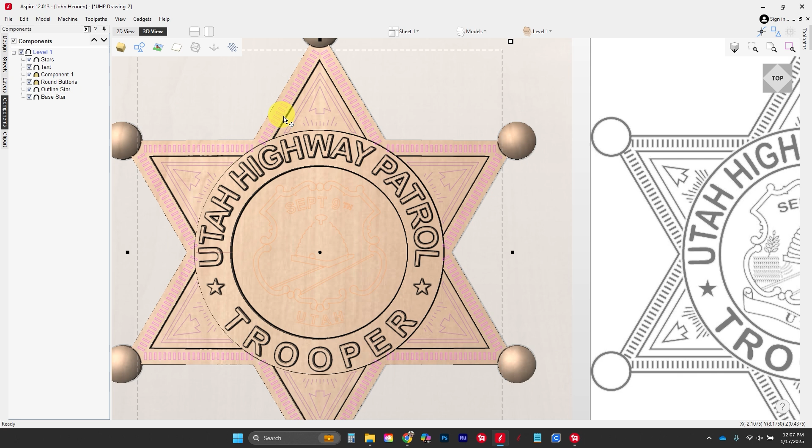We're going to start again working from the back to the front. So the outermost back piece is going to be these little dashes right here. Let's go to our design tab, we're going to use our angled shapes, and I'm going to set this at 60 degrees.

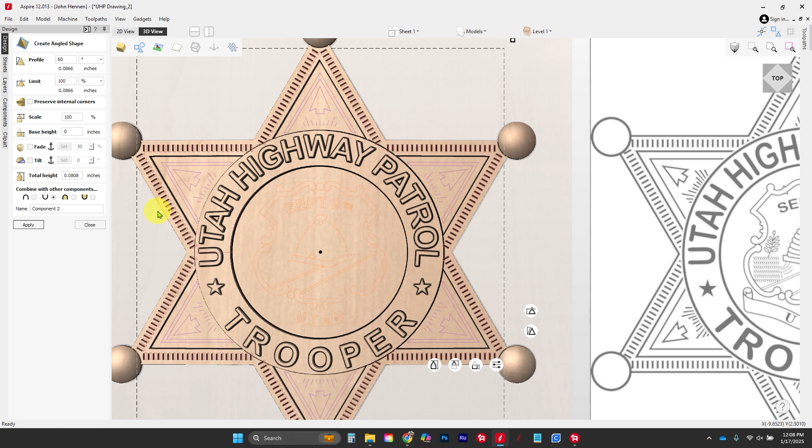We're going to put this on subtract, which means instead of going up from the plane it's on, it's going to go down. So instead of making points that come upward, it's going to go down. We'll go ahead and click apply. So what we've done is add these little dashes in here that are going to go down in.

With that one done, the next shapes are going to be our arrows, so let's go ahead and work on those. We're going to go to our 2D view here, and when we build these we're just going to select one arrow, do like we've done everywhere else, and array it around the piece. So let's go ahead and build this one arrow.

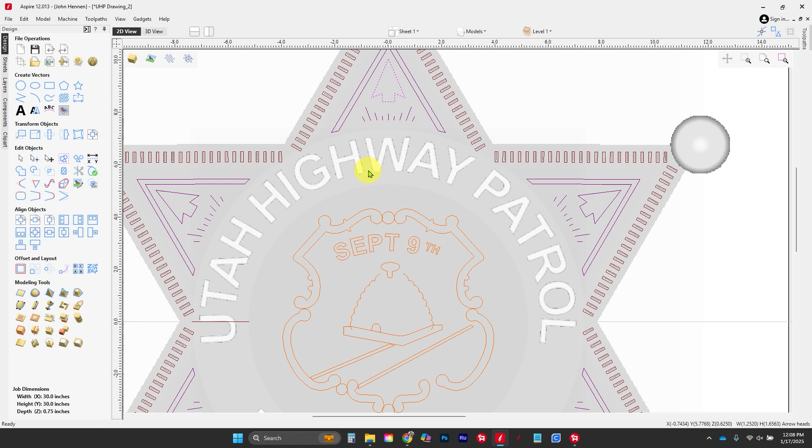Now when building the arrow, I want to make it look like an actual arrow. One of the things I'd like to do on this one in particular is make sure we are first in the arrowheads layer.

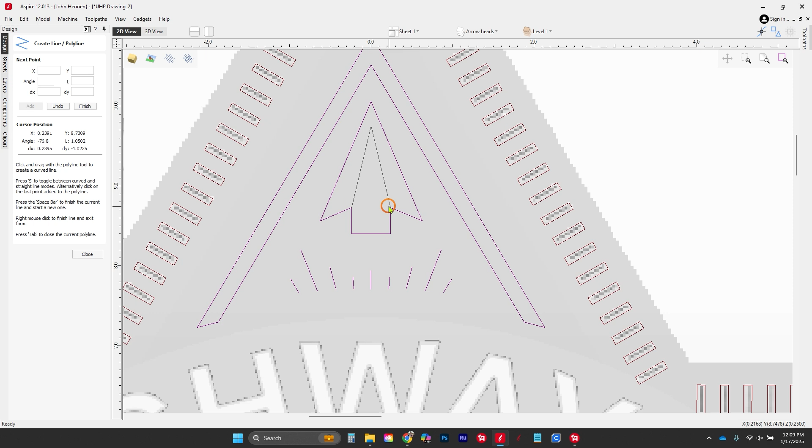We're going to come up here, bring it to about maybe there, and then down to here. We're going to add and cut this arrow into two pieces to make it look like a pretty cool little arrowhead.

So there's our first set of lines we're going to add to it. We're going to go to our node mode here. I'm going to cut this away and cut this away, and I'm going to take this section here and join that together.

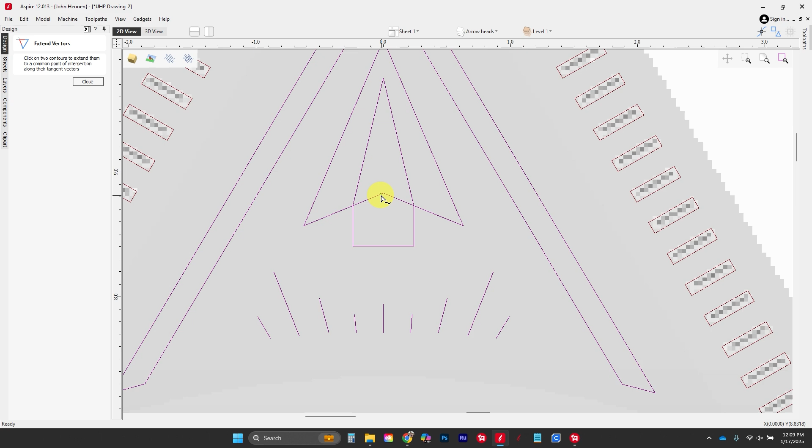Then this one here, I'm going to use another tool called extend, that's this guy right here. Extend is going to allow me to extend this one till it touches that one, just like that. We're just going to make sure that they're closed. Now we have a two-part piece that we can work on.

So let's zoom in on our 3D view and see what we can build with this guy. First things first, we're going to build this one, and this one's going to be pretty cool.

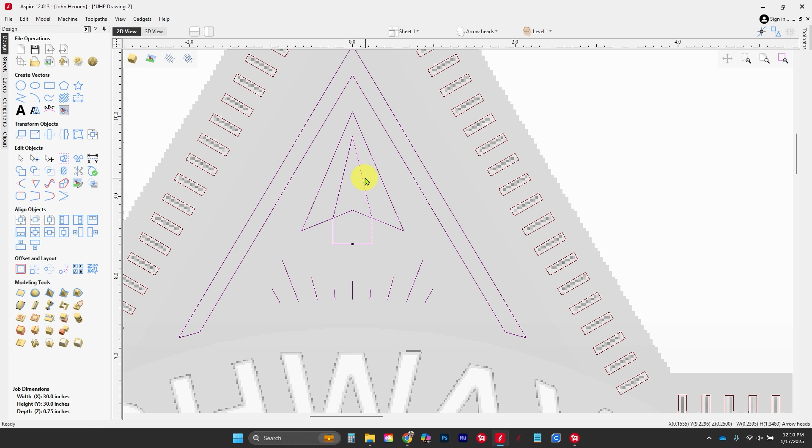We're going to do what's called a turn and spin. To make turn and spin work, we're going to cut it right here in the middle, cut it right there, and then we're going to take the left side—so the right side of the model right here.

And we're going to use this one here called spin. It's going to say we're going to do a turn, which is from start point to end point. It's going to rotate over, and we're just going to hit apply. Let's see what she does—she's going to give us that point right there, which looks pretty cool.

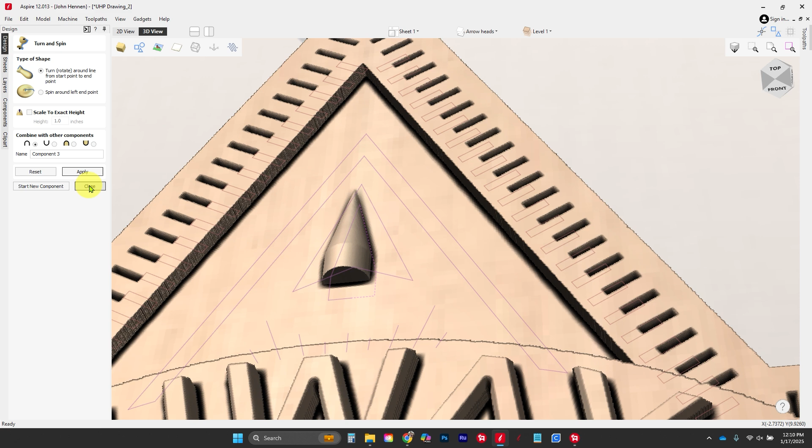I do like it. Now what we're going to do is scale it to an exact height, and we're going to make that height probably something close to 3/16 of an inch. Let's see what she looks like here. All right, that is kind of what I'm looking for, and we might change that a little bit more. We'll see in a minute.

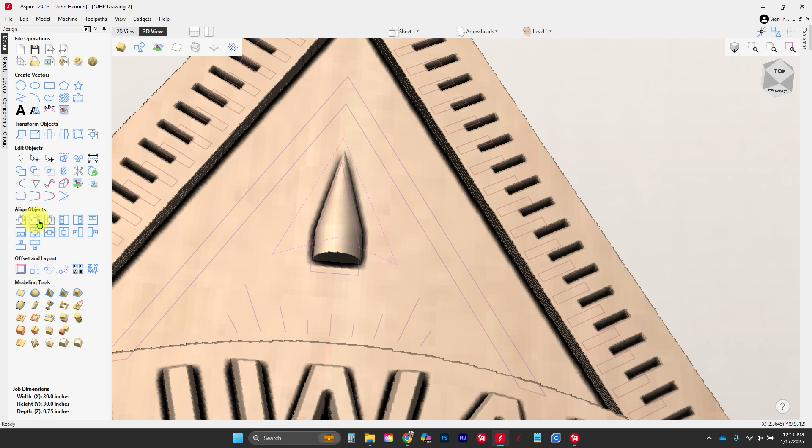Okay, now with that portion done, we're going to use the outer piece. And the outer piece, we're going to draw it, and then lift up the back side to make it look like an arrow pointing down and in. So on this one, we're going to use the angular shape.

We're going to make it probably something close to a 45 degree angle, and then I'm going to limit it—this time to inches. Let's make this like 1/4 of an inch. Okay, and it's going to look something more like that. Okay, the flat's a little too flat.

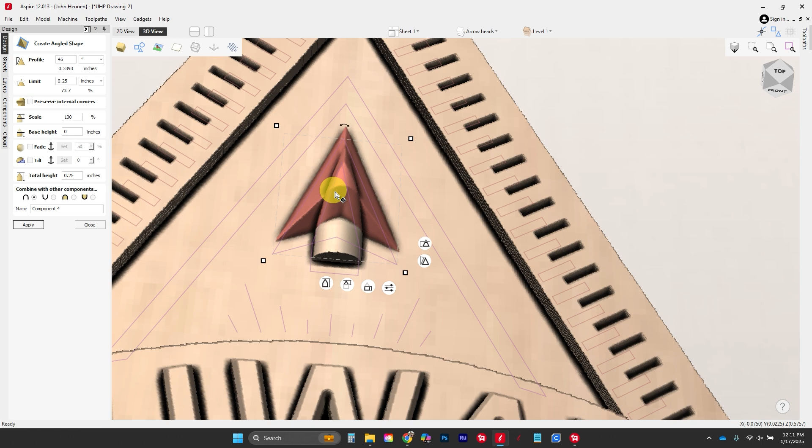I want to do a taller angle, so let's go with 60. I want a longer flat in there.

That's a little better. Let's try like a 75 - I think a 75 will look really good. Okay, let's hit apply again. That's kind of the shape I want.

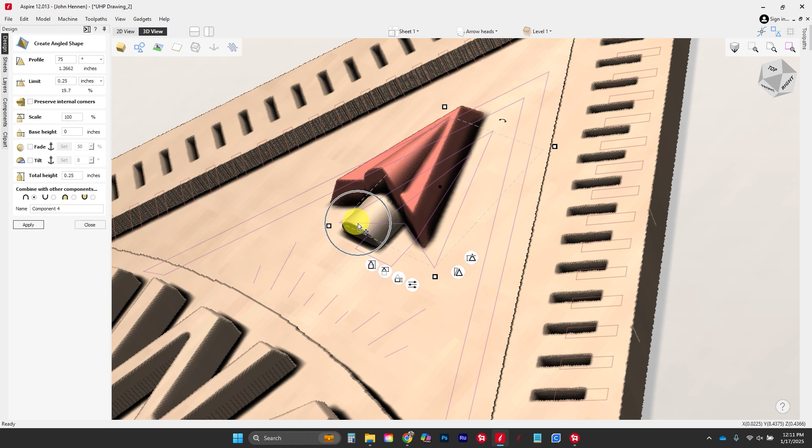Now what I don't want, of course, is that this guy's disappearing into there. So we're going to change this to like about 1/8. Doesn't need to be very tall. I want it a little bit smaller so I can lift the backside up. Okay, here we are. We look good.

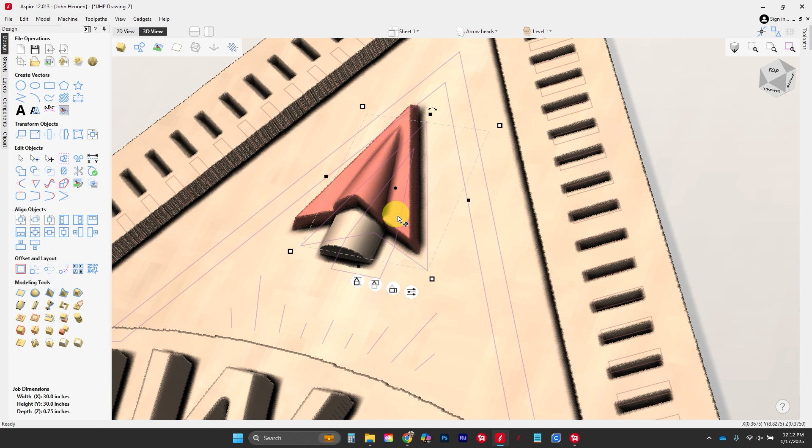We've got a little problem here with the blending of everything because we have an ad on top of another piece here. So we have to figure out how we handle this. Now, the problem is I want this piece here to merge into this piece here. And if I merge them, then what happens is they'll all disappear down into the base of here.

So I have base star. So to make this work, we're going to come over to our Components tab. We're going to right click here and go insert a new level. And this level, we're going to rename. We're going to call this the arrow and points. Arrow and points. Okay, so that's this one.

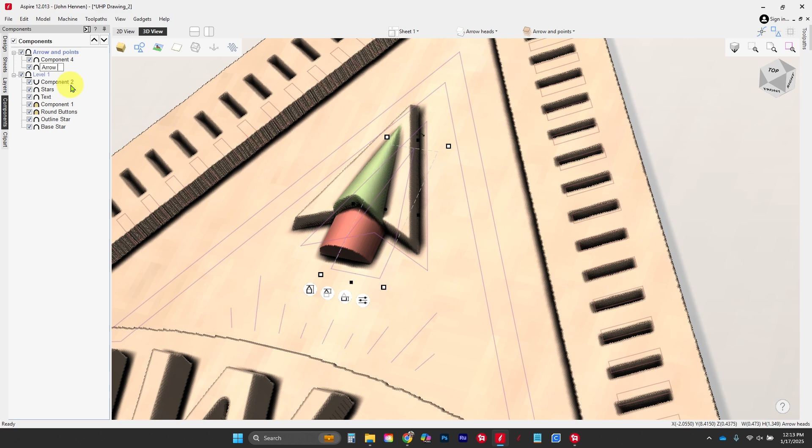Now I'm going to take these two components, these last two, which I forgot to rename, so we can rename them now. We're going to take this one and rename it - this is going to be the shaft of arrow, or arrow shaft. And this one here, we're going to rename arrowhead. You don't have to rename things, but it does make it kind of nice.

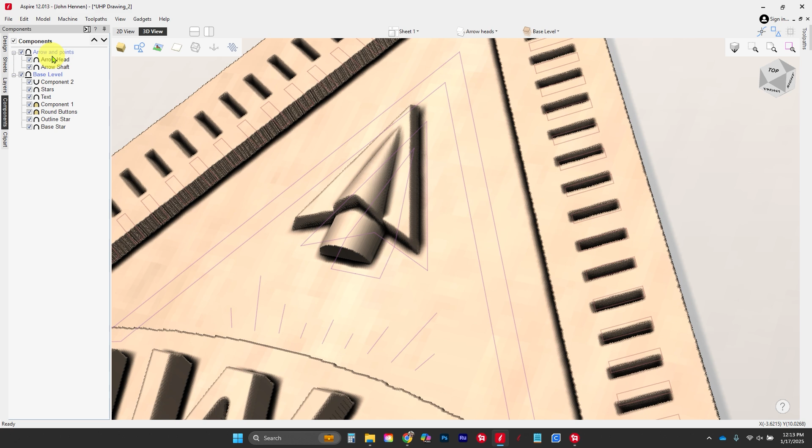So now what happens is that this level, which we can rename our base level, has all of our base components here. And now everything we're putting on top of something else, like these, for instance, we're going to say, I want this guy here to combine, merge, with the other one. And so now it's going to look kind of like this, more like an arrow.

The only thing I want to do from this one is when I tilt up the back side, maybe bring that one in a little. Let's decide. Let's go ahead and play with it now that we can. Okay, so there's my arrow.

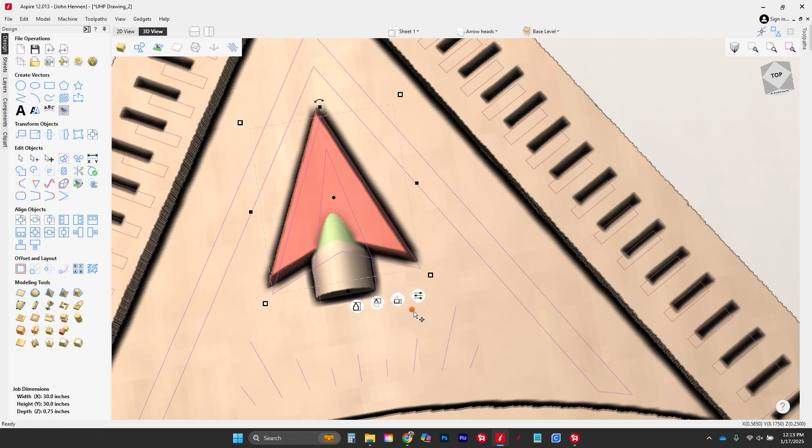I want to take maybe this guy here and squish him because I want to drop his Z height, but I don't want to do anything else. So I'm going to come to here, which is my shape height. I'm going to change it to an eighth and just see what it does. I want it kind of a little flatter, not quite so tall.

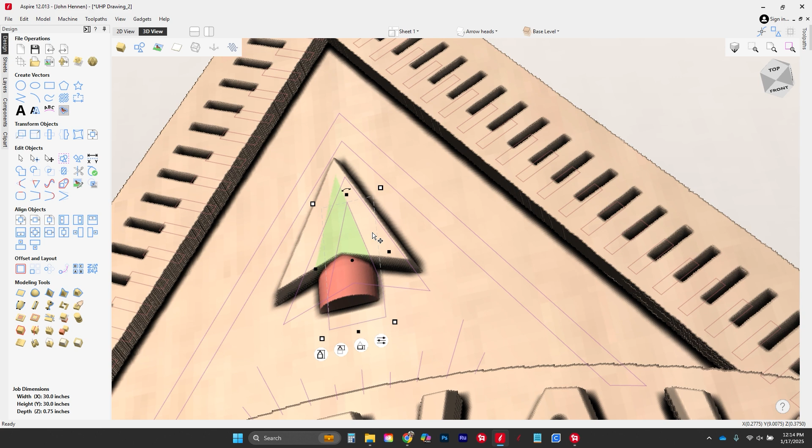Okay, that actually looks pretty good. I want to work with this one here, and I'm going to go back into my angular shape. I want to bring this one back to a 60. I do want a little bit more angle on that one there. That looks a little cooler. All right, so I'm pretty happy with that arrow.

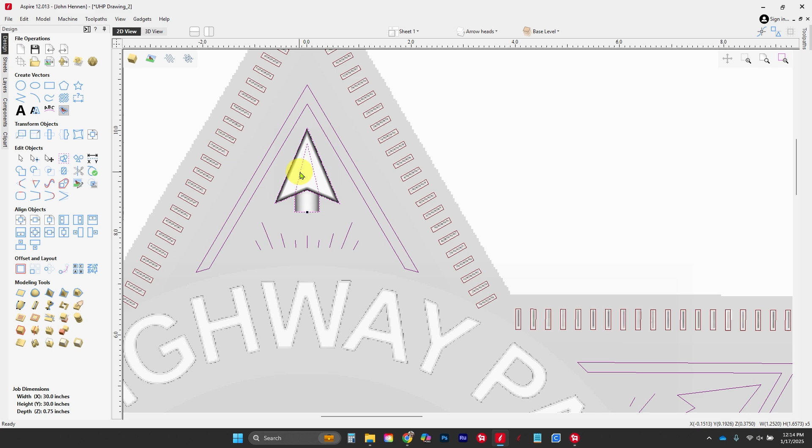Now what I do when I have these all together is I'm going to take both of them. And what we'll do is we are going to go ahead and make them array around to the other 5 points. So just like before, when we were doing it in our 2D, we can do it in our 3D. Circular copy, rotation center of 0, 0. We're going to make 6 of them and copy it around. Okay, all right, so now we have our arrows on every piece.

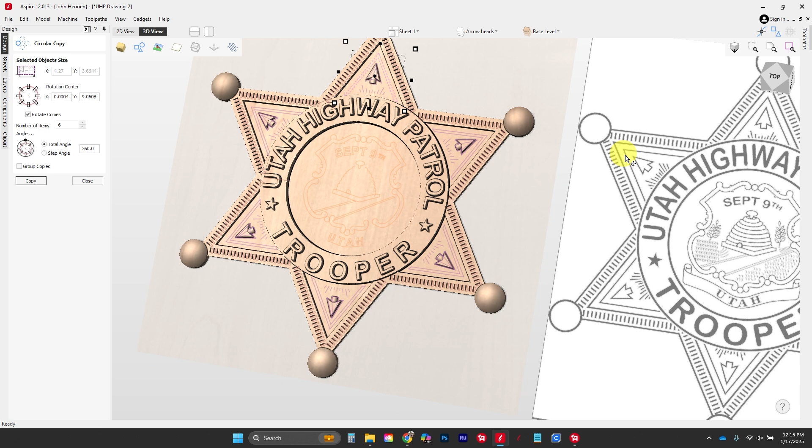All right, this next piece here is kind of a neat little decoration piece to it. You know, just kind of a little line in there. And so we want to make it a little cooler than a line. So on this one, I'm going to bring it up. It's going to be radiused.

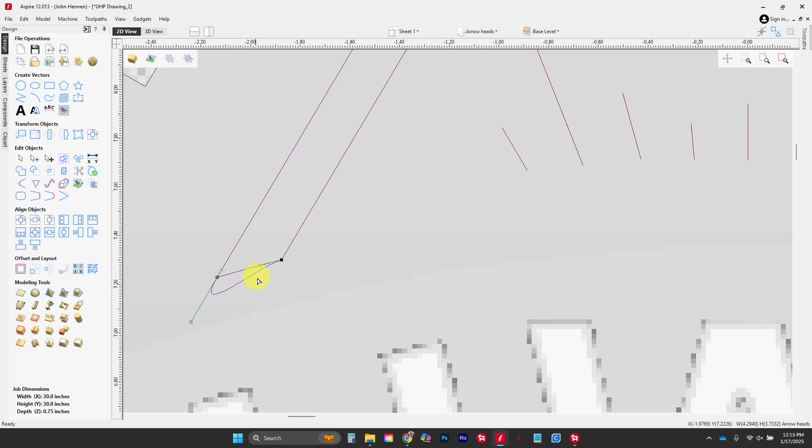And I want to kind of fix these ends here, though, because I don't want them to be radiused off right there, I want it to be cut off. And so to do that, I'm going to take this, copy and paste it, so there's one on top of the other one. And I go to my node mode. All I want to do is pull both of these until they're parallel. Just like that. Okay, and let's pull this one out just a little bit more. So what they are is they're just going to be parallel with that line right there.

Okay, let's do the same thing on this side. So coming down, it just kind of comes right off that line into there. And this one, it comes right off that line into there.

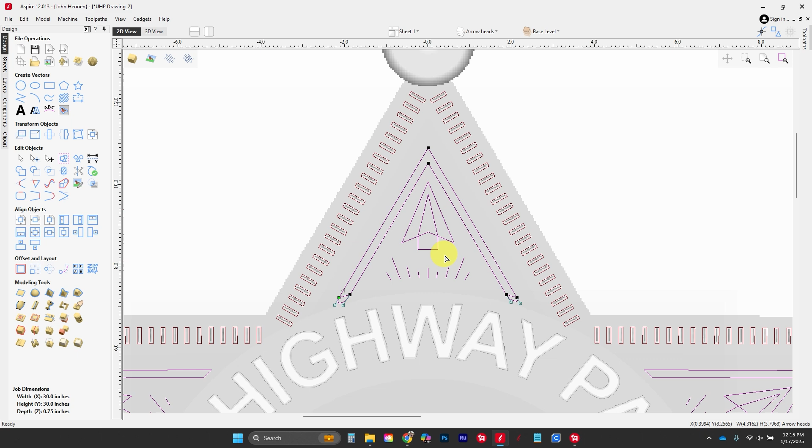Now when we create this shape, it'll give us these nice butt ends that we can cut off the end. So let's go ahead and do that. Go to our 3D view so we can see it happen. Zoom in nice and close.

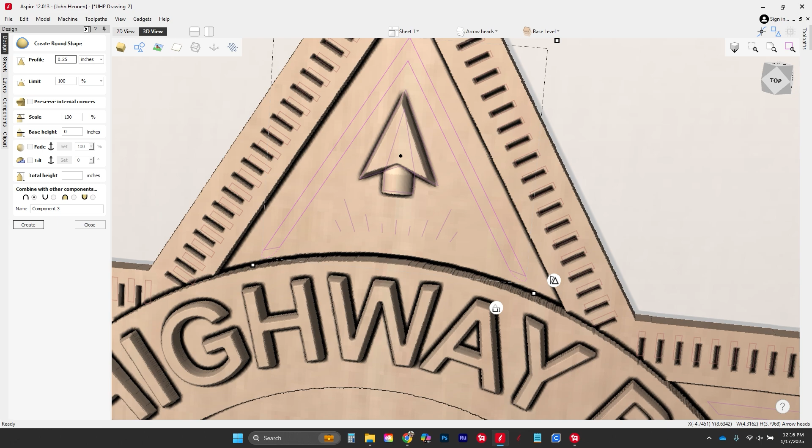Okay, we're going to create a rounded shape. I'm going to make my rounded shape. Let's go to inches here, and we're going to go 1/4 inch tall. It's going to be an add because I want to apply it on top of the other one.

Okay, I like it except for right here. We have this little bump in the middle. So sometimes create shape isn't the right thing to do. So let's Control Z that one and get rid of that shape.

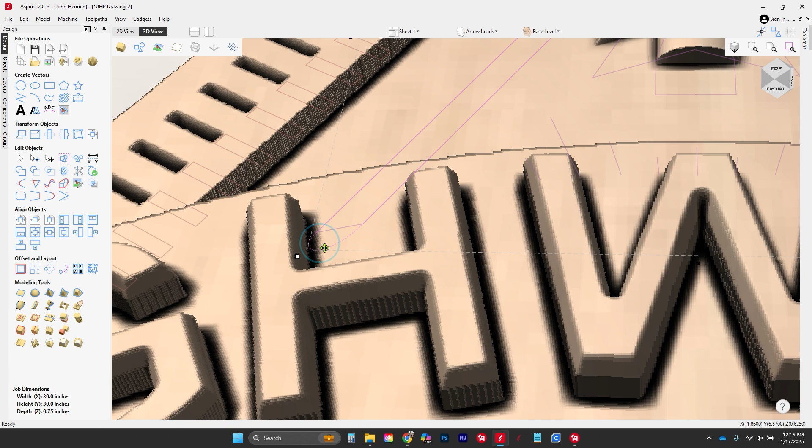What we'll do is change the way we build this thing by doing a 2-rail sweep instead. So let's go to here. This time we are just going to delete off this edge. So we're going to delete this end, and we're going to delete this end here.

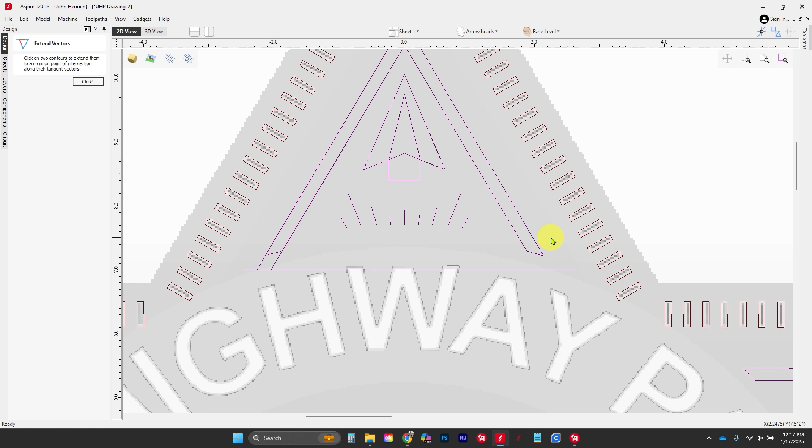And what we'll do is we'll draw ourselves a line. Now this is just going to be a parallel line, and we're going to extend our vectors to this. The reason we're doing this is I want to be able to cut it off right at the end point when I'm done.

And we're going to grab a circle, create a small circle here. It doesn't matter a whole lot the diameter of the circle, we just don't want a massive one. We're going to delete off the bottom half using our node mode. Again, this is back to vectors, 2D before 3D.

We're going to grab these two pieces here, go to our 2-rail sweep, and hit Use Selection. I'm going to grab this one and click here.

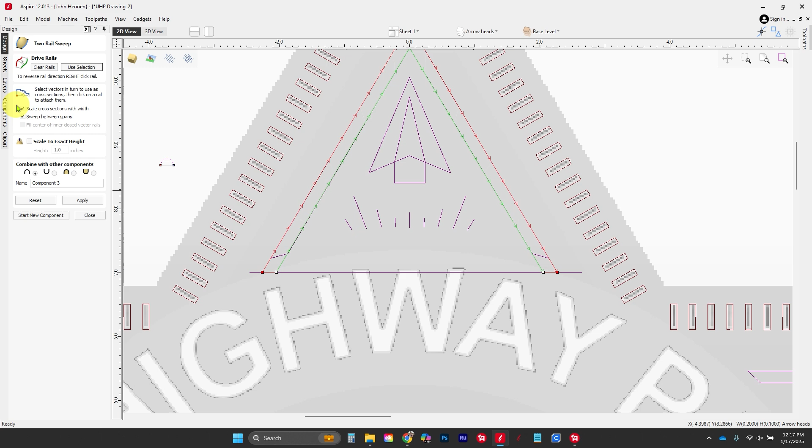And some of the things we're going to do is uncheck this box, this scale cross-section width. I don't want the cross-section to go taller between them. Then I'm going to pin it here so it comes down to the bottom, and let's hit Apply.

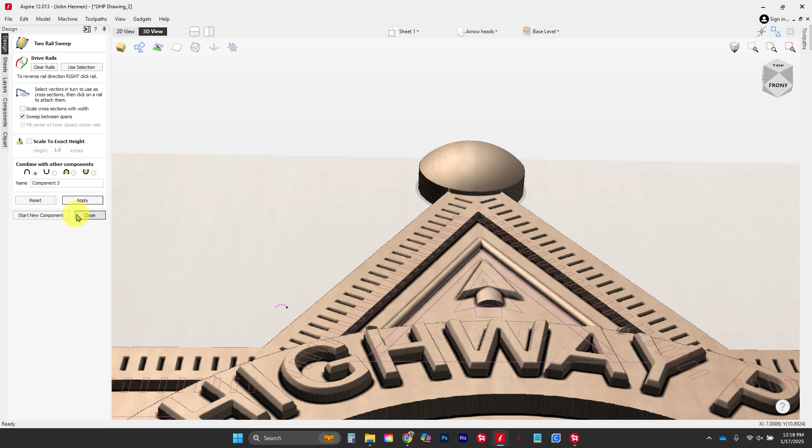So now if we look at it, see how we don't get that bump at the top? It's going to all stay the same height, which is perfect, that's just the way I want it. So I'm going to hit Close. She's beautiful. And then I'm going to go back to my 2D view.

Let's select that component, move him up to arrows and stuff. Okay, and I'm going to hold down Shift, grab my completed one here, and I'm just going to cut it off right there.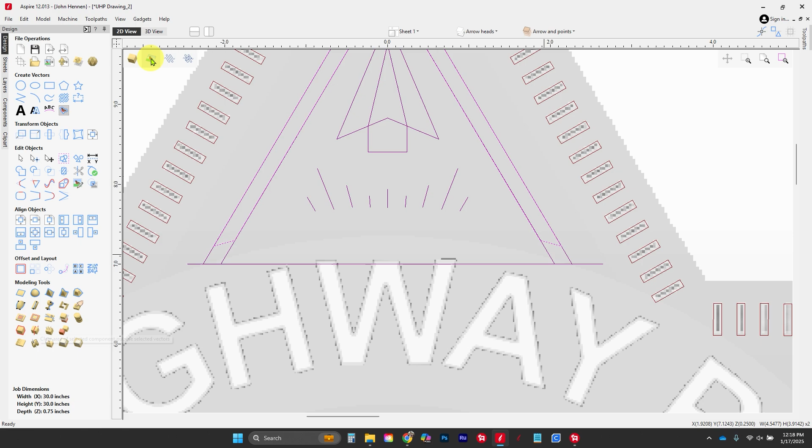So we're just going to trim everything outside of that, and it's just going to cut off both ends right there. So now we have this guy here, which is cut off based on the radius.

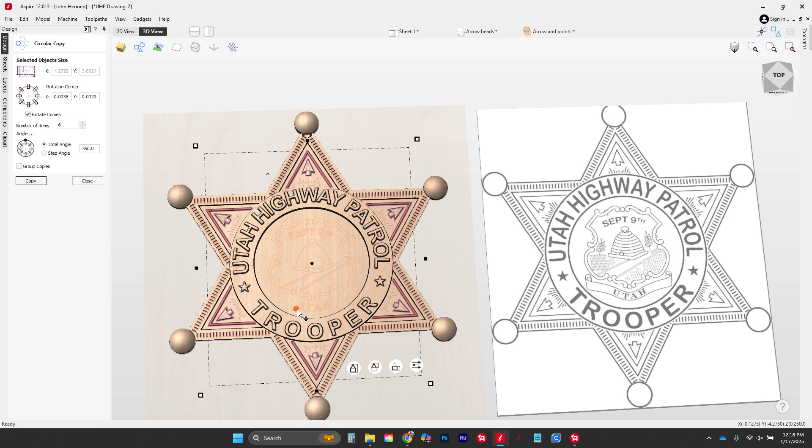Now we can take him and do the same thing we did before, so we can array copy. A lot of people ask, well, why don't you just do this all at once at the end? And you can, but I like to see it all kind of come together a piece at a time. So I like to array it when I can see each piece and say, yep, I do like that. We're starting to build and build and build onto our model.

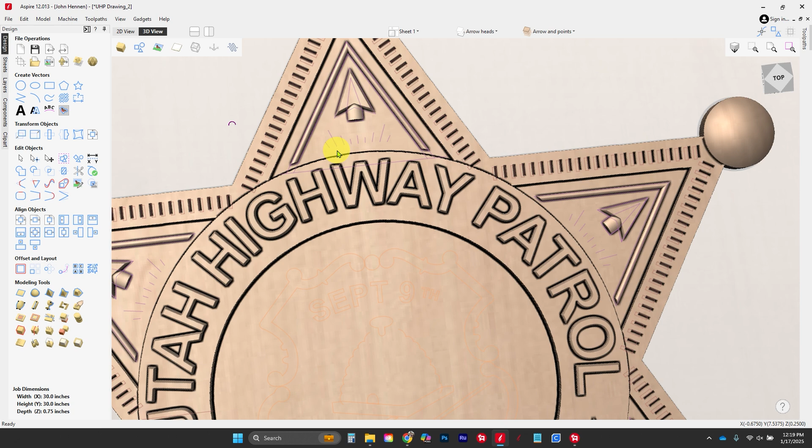Okay, now there are these little dashes right here, and those dashes, I try to figure out what would be really good to do with those. Those are going to turn into an actual toolpath. We're going to use a 15-degree V-bit to just line those up. What they are on the actual badge, having seen a couple of them since I decided to do this one, are just very small marks that look like it's shining coming out of the middle. So we're going to put those in as just that.

Okay, so now we're off to the middle section. Now this center section here, I want to do on its own layer again. I'm going to right click here and we're going to go to Insert a New Level. This is going to be called the center, of the badge.

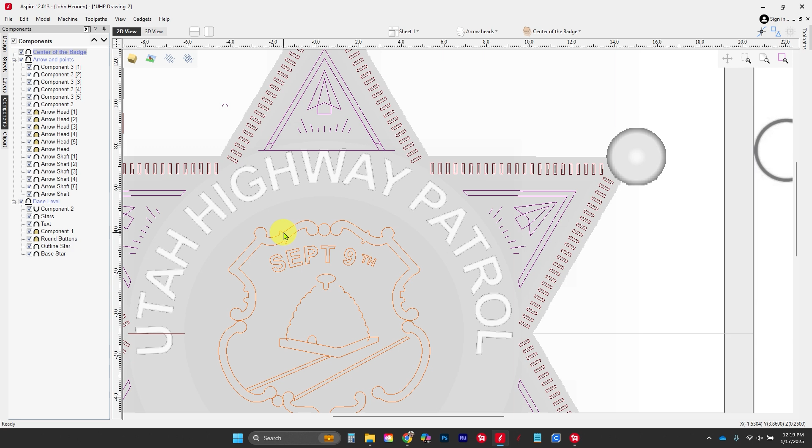Okay, now this one is a really cool section because there's lots of things going on, and how we're going to build it is all going to depend upon what's going on. The first sections are going to be pretty simple. It's going to be all these outer pieces, and we'll do them all at once as long as they don't overlap. You'll notice we're doing the balls separate, and there's a ball over here that's actually missing, so we're just going to mirror that one across.

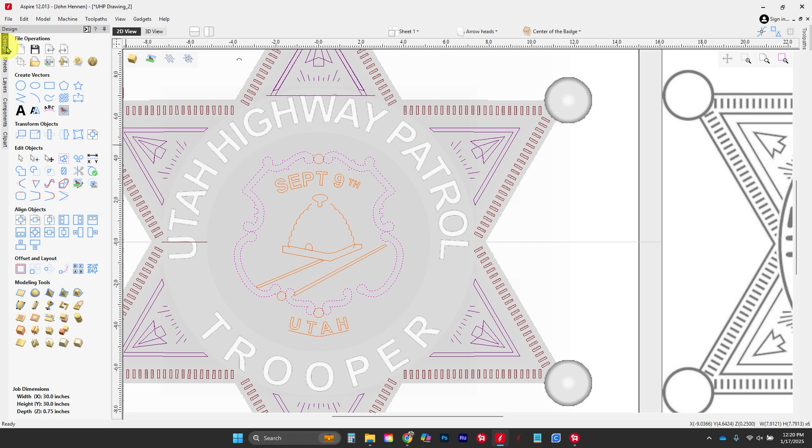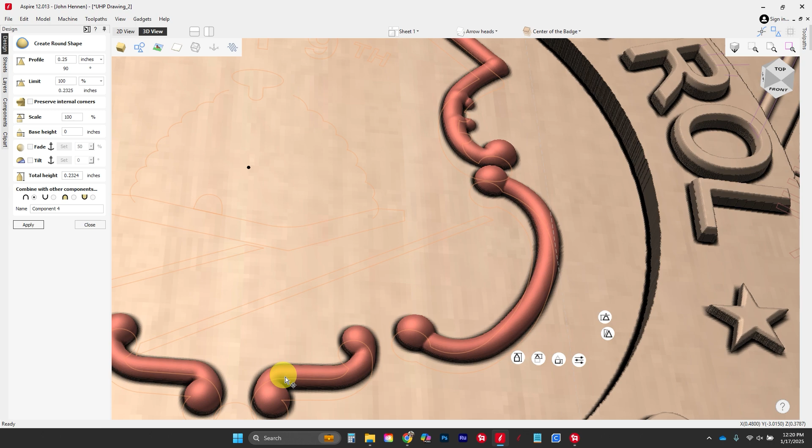Let's go to our 3D view. Let's watch as this happens. We're going to raise it up, and we'll just go to inches and call it 0.25. You'll notice that a lot of times I'm going to make these close to always the same. Once I see something that I like, I'm going to try to keep it. What I do want on this one is you'll notice that these do come up, and I want them that way because the balls will do the exact same thing, also coming up prouder. That's what we want on this particular piece, so we're totally happy with it, we're going to leave it that way. This is going to be called flourish, or outer flourish.

All right, let's get the one piece that's missing, this guy right here. Let's do a quick flip horizontally. Boom, now it's there again. And let's grab you, and you.

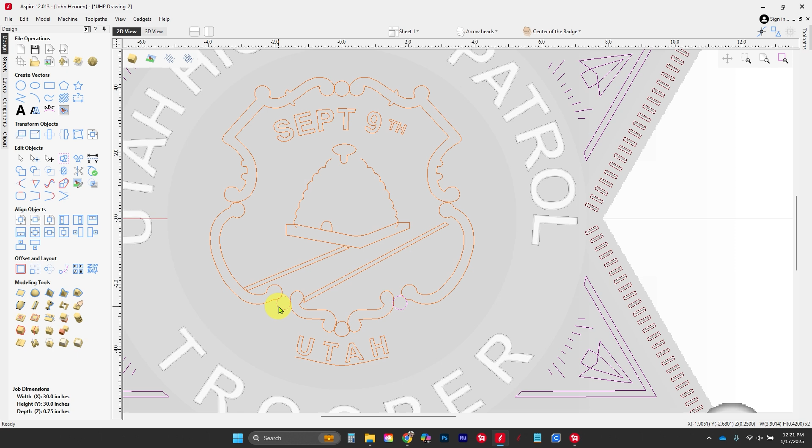Now on these ones, all I want to do is lift them all the way up, so we're going to dome these ones. These are going to go a full 90. Let's just see what they do at a whole half circle. Okay, they look phenomenal. We're going to merge these ones, so if they overlap, they don't screw anything up. It looks like I'm missing one right in the middle, so I'll hold down Shift, grab that one too, hit Apply again. I want that one in the mix.

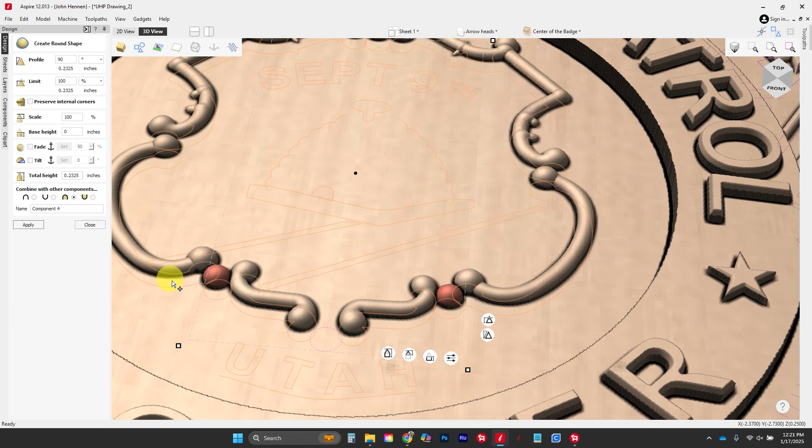Now it looks like maybe that one is not a closed vector, so go to our node mode here, and let's just look at that point right there. It's not in it, so we're going to go to here, say join. Let's see what it will do for us here. Okay, you coming up, here we go. All right, there we are.

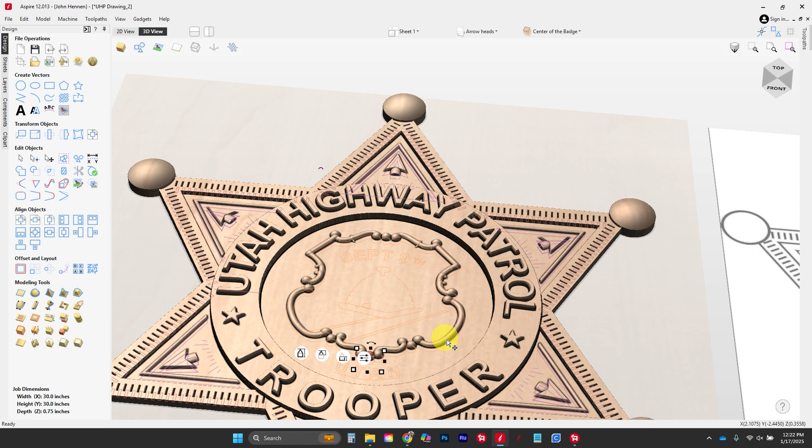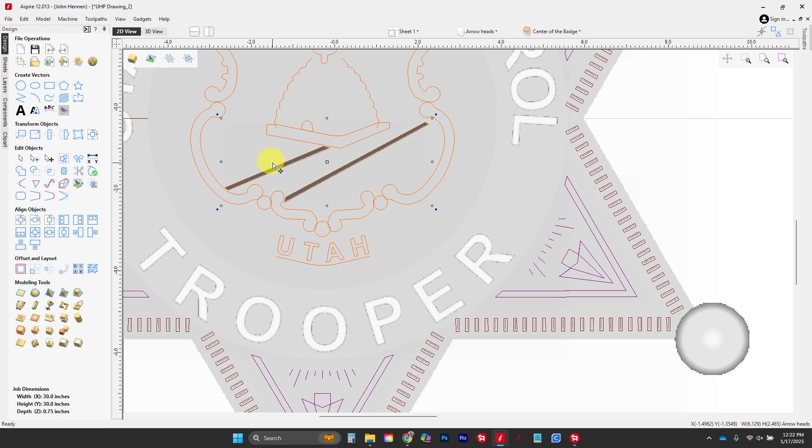So there's our balls section of it, looks great. Now these two next pieces here, these are kind of the road that's going up there, some lines. Let's grab those ones, let's deselect this. You can see these two lines here in the middle in our 2D view. They're going to be these two right here. Those are just going to lift up, just a straight flat lift. So here, I'm going to go up about an eighth. Okay, and we'll create that component, that looks phenomenal. So it's going to look like this. And now we've got to build the lettering.

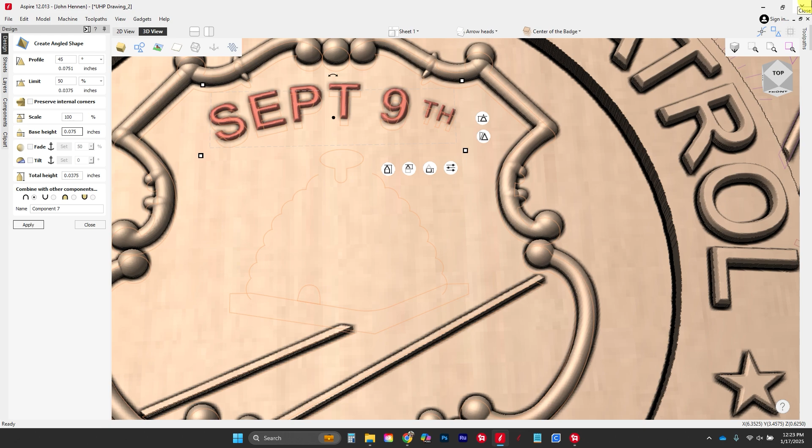I like all the lettering done at the same time, and we're going to build this one with the same chamfer that I like done over on these ones, just because I like the way it looks. So we're going to go at 45, we're going to limit it to, let's say, 50%. Then we're going to give the base height about equal to the profile height, so about 0.075, we'll do 0.075, and let's just see what that does for us. It should lift it up, give us a nice piece, and it looks great. Okay, here we are there.

Now we have the beehive. The beehive's kind of a tricky little piece here because how do we want to build this to make sure it's going to look just right? Let's take a look at it in the 2D view and talk about what we can do to it. We could do a turn and spin if we connected these two and then cut it off halfway. We could do a 2-rail sweep, which would just start here and sweep that direction to give us some nice radiuses here as we built it. We could join it together and do a lift on the shape, could also give it that. So there's 3 different ways we can build this piece.

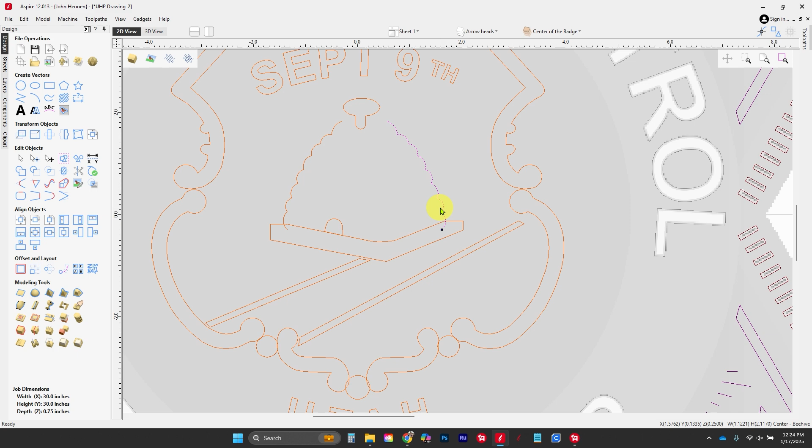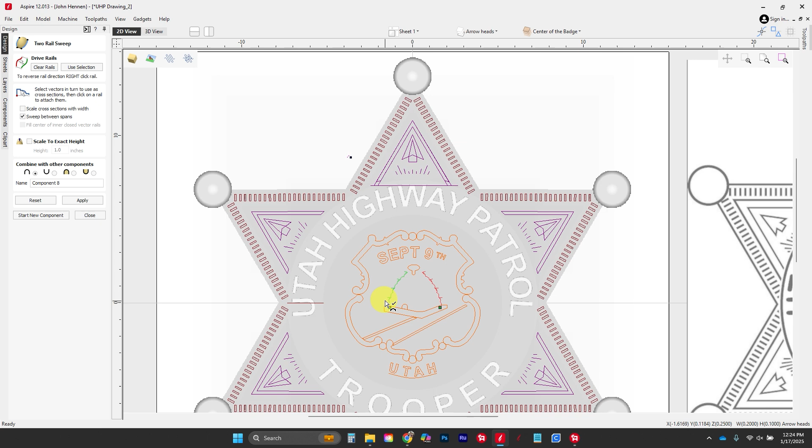Let's start with the first way, which I'm going to try, which will be just the 2-rail sweep. So to build our 2-rail sweep, we can use the same half circle we have right there. We're going to go down to Shift, we're going to grab this one. Let's go to our 3D view, go to our 2-rail sweep, hit on Use Selection. Use Selection, and let's see what she's doing here. Okay, and then we'll grab this guy as a cross section, and let's just hit Apply. Okay, we get this right here, which is dang close to exactly what I want.

So what I wanted to do maybe is lift up just a little bit higher than that. So I'm gonna go to my scale to exact height, and maybe not quite that high. Let's see what happens if we go to 3/16.

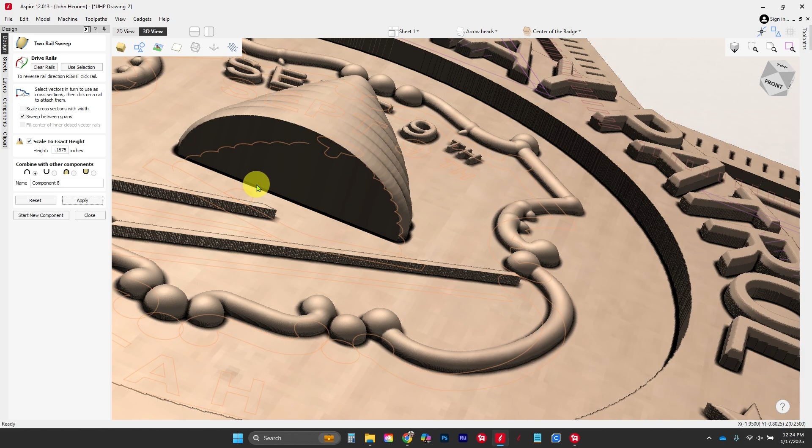Okay, that I can live with. That I kind of like. I like how the lines kind of disappear out here because it gives us somewhere to put our little doorway.

What I'm a little concerned about is we're not quite low enough. Right here, you can see how we're not quite all the way to the bottom right here. So I do want to do a little bit more of that one.

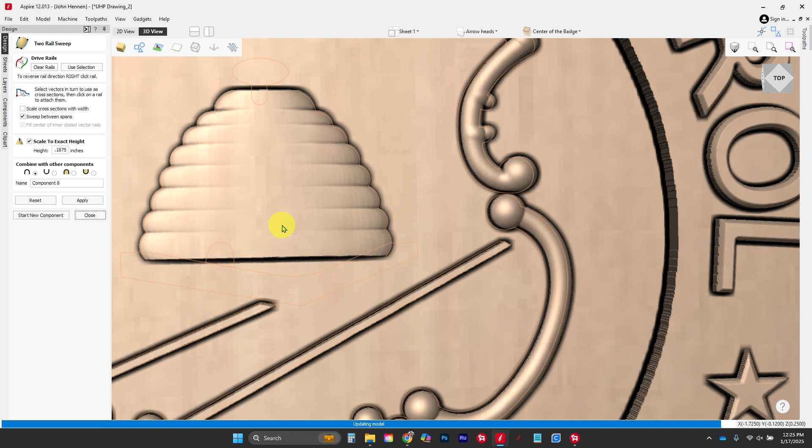So we're going to take this and actually pull this down, so it's going to look a little bit more 3D, and we're going to see if we like it. If we do, great. If we don't, that's okay too. So we're going to grab this piece right here.

We'll do something fun called Distort, and that is this guy right here. I'm going to my Distort. I'm going to make a bounding box, and I'm going to apply that box. I'm going to have this box right here.

Now I'm going to go in here and make this bottom line hit, and I'm going to turn this into a Bezier curve. So Bezier curve this one. I'm just going to pull this point down here.

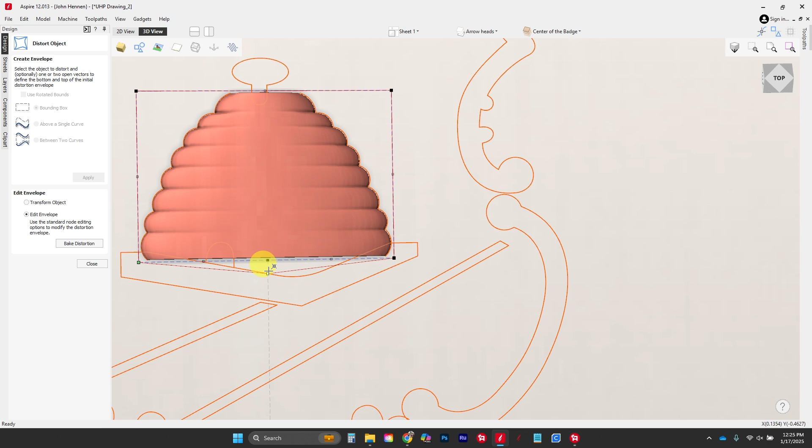Okay, now as I pull everything, see how that just kind of brings it down? Well, I'm going to bring that point over just a kiss because I think it belongs a little bit more over here. So let's do it.

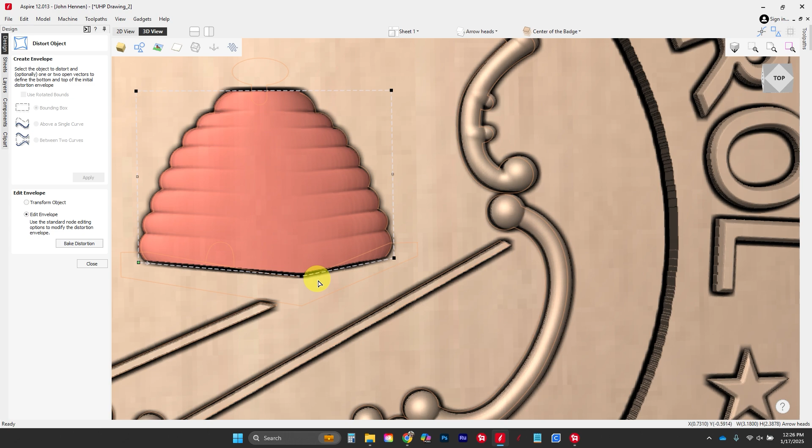See what she looks like. All right, now that looks pretty cool. So let's go ahead and call that where we want it.

We're going to now take this little guy, and this is our little doorway, right? We're just going to push it down in. So like before where we just lifted things up, I'm going to say just push this down like 1/8 of an inch and go subtract on this one. It's going to subtract it out.

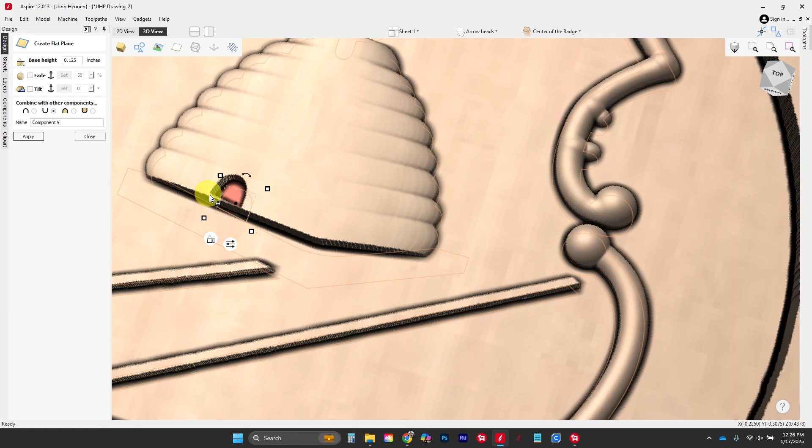So we click on Create here. It's going to be pushed down in. It may not even need to go that deep. Actually, it's not terrible, so let's leave it.

And then this guy, this is our top piece, so it's just going to come up and it's going to be on a merge. This one will merge into the bottom of this guy, and we're going to go on this one 1/4 of an inch. See what it looks like. Hit Apply. Here we are.

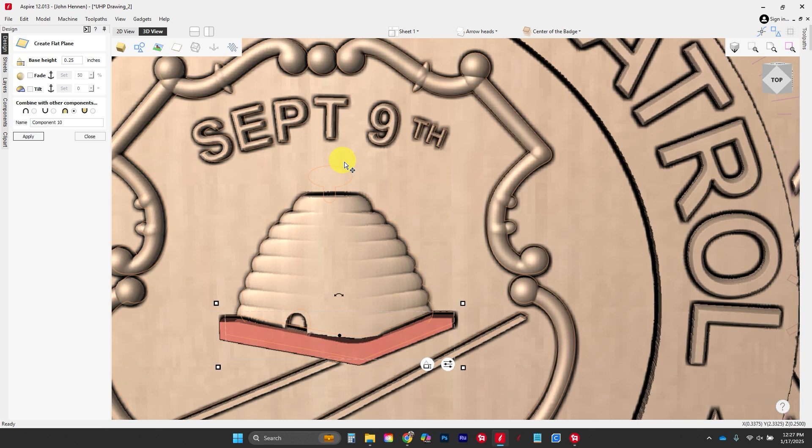So we're looking like we've got a really cool little beehive there. Our last piece is this top little button right here. And this top little button is going to be a raise.

Our last little piece is this button right here, and we're going to just lift it up with a Create Round Shape. I'm going to go about 60 degrees, and I'm going to limit this one on a percentage.

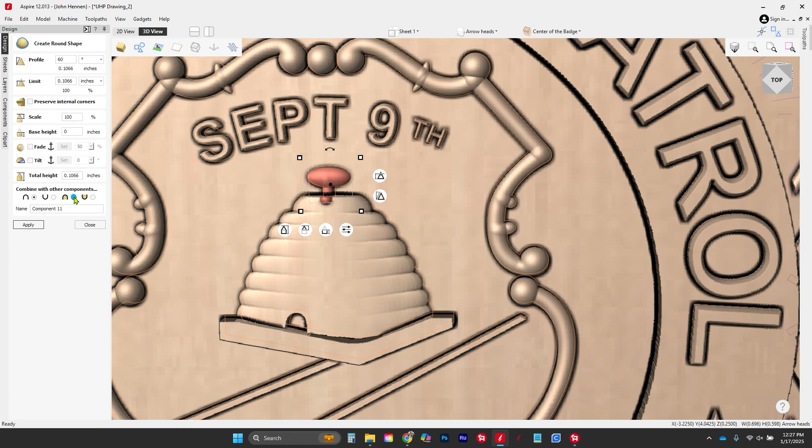Let's not even limit it. Let's just change that to a merge. And let's hit apply and let's see what it does for us here.

Now what I like is that it's there. What I don't like is it's a little too low, and you can see that from the side view here. So what we'll do to that one is we're going to bring it up about 1/8 of an inch on the flat. Okay, let's apply that one.

Okay, maybe let's go to a 16th.

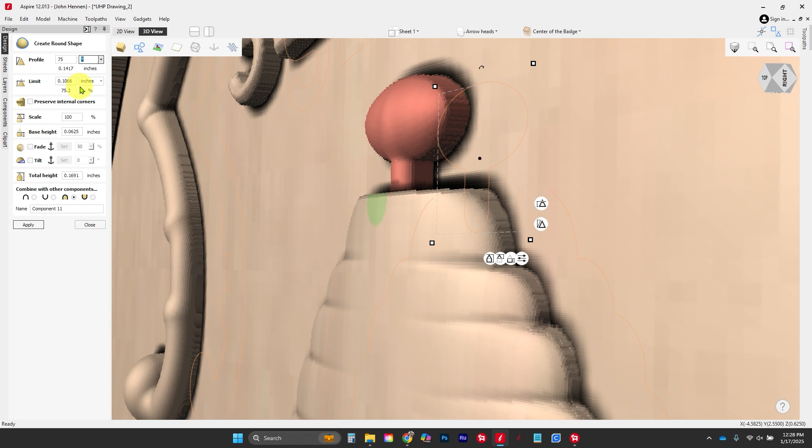Now, if you've been to any of my training classes or worked with me one-on-one, I like to call this the Bob Ross method. This is your happy little tree. You're going to build this how you like it, and whatever it's going to be, as long as you're happy with it, I'm happy with it.

Okay, so there is our piece that finishes out our badge. There are a couple little pieces here that we're going to V-Carve in. I'm not going to worry about that because this is a 3D modeling class.

So here's our badge. We're looking great. Happy with it. Let's kick this off, kick off our vectors, and here's our total badge.

Now, at this point, we go to our components. We're going to do this one more time where we insert a new level. And on this new level here, we're going to go to our design tab, and we're going to use this button here called create a component from a visible model.

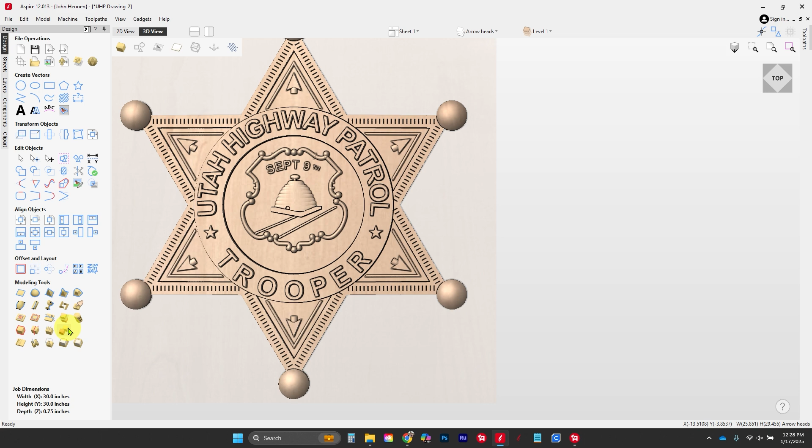The reason we do this is it takes this entire badge and makes it one model. So it's not a whole bunch of small pieces that we're going to be working with. It's one complete piece. Now by unchecking all of these, we can turn these off.

And now we just have one model that has everything built into it. Our last step is to go back in and add our dome to our model. Here's our piece, she looks beautiful. We're going to come down to our drawing tab, grab a circle, and draw a big circle right there.

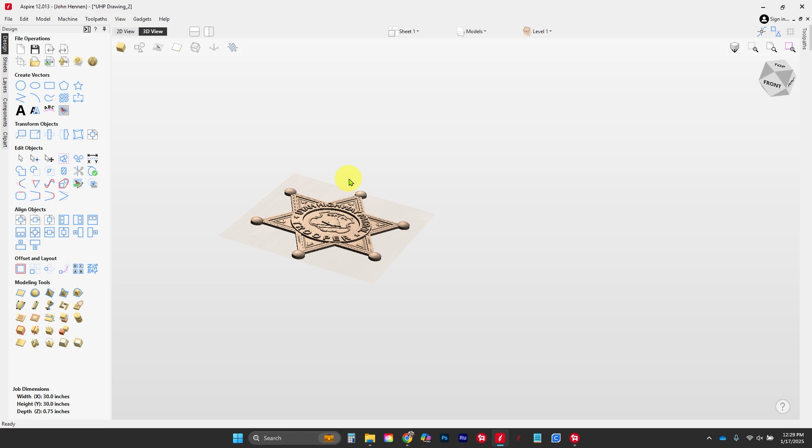Let's center our circle in our part, and make this a full 30 inches. We're going to lay this badge on a dome. If you've ever seen a police badge, it usually has some type of radius to it. Right now this is boring and flat, so let's add that in.

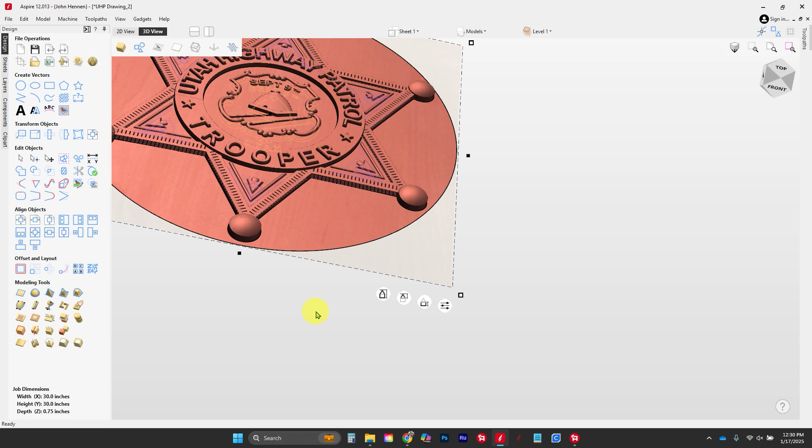So we'll turn back on our vectors and select this guy right here. I'm going to go to dome, switch it to inches, and bring this up 3/8 of an inch, so over the entire dome it's just a 3/8 inch dome. We click on create, and now we've given it a little bit of a curve.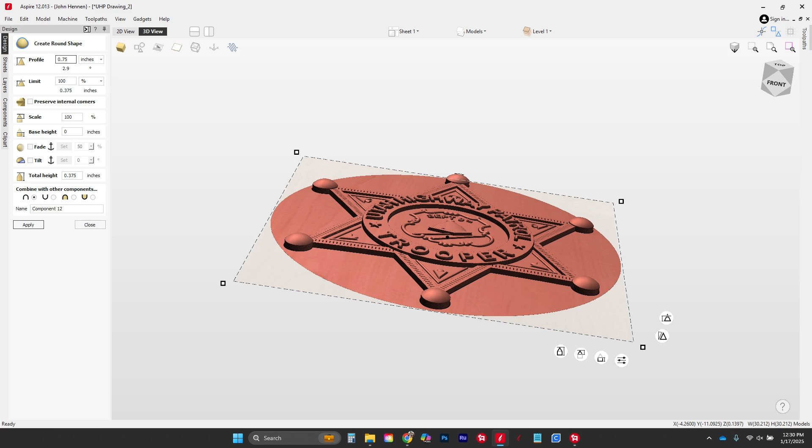Now we can look at this and say that's a pretty small curve. Let's rotate this up so we can see it. We have all of our model on a nice curve right here, so we're going to push it up just a little higher. Let's throw caution to the wind and make this a full 3/4. All right, that now looks about the curvature I wanted.

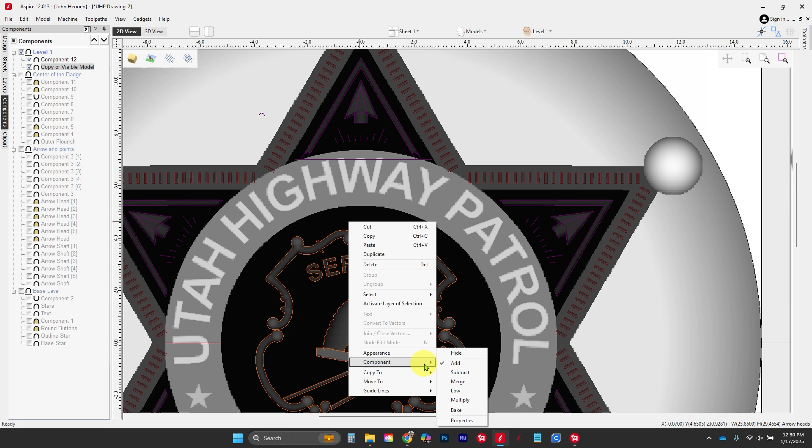You have a nice curve like you'd see in an old Western movie, or in this case, the Utah Highway Patrol. From here we take our model, and again it's all one massive component. We'll right-click, go to Move To, and say the front, so we can always see that model.

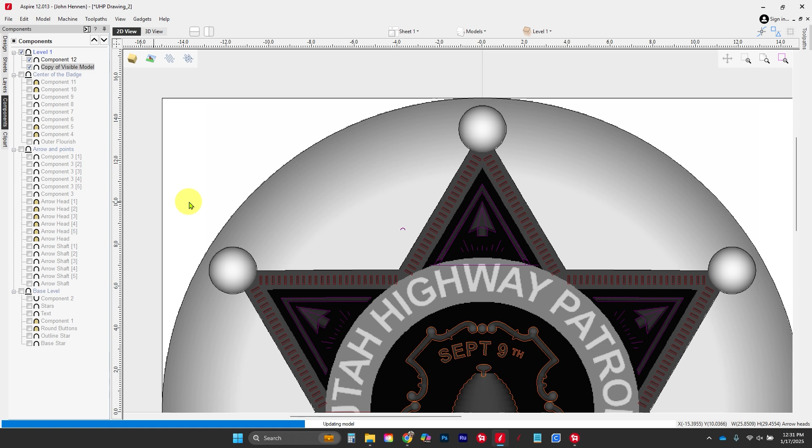We're going to turn this one off for a minute. I want to grab this guy and put a border around it so I can trim off the dome. Go back to our design tab, use this button, create a vector boundary. Our boundary's been made. Back to components, turn this back on, click this one, click on our outside border, go back to design, and delete everything outside of it. Now we have a nice, beautiful badge that's on the curvature and everything else.

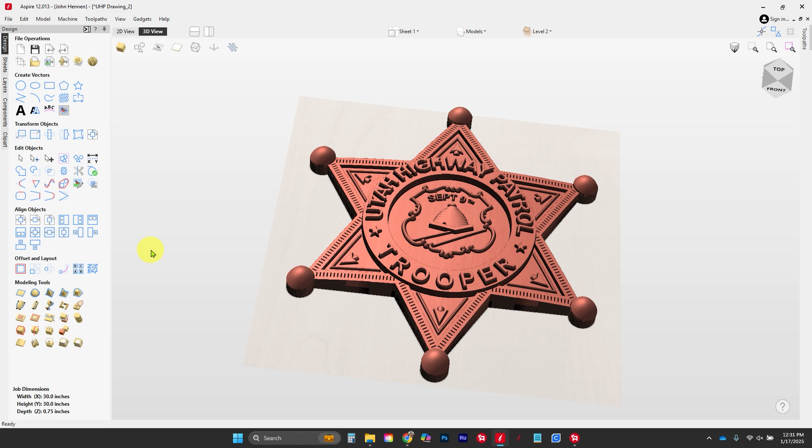One more time, we create a new level and make our component from our visible model. Now we have a flat badge and a curved badge, and we can decide what we want to do with each one.

So this one here, I'm going to rename as finished badge. It's now ready to be used in anything that you want, really. So we'll select it, go back to our design, and now we can export this. We can do all sorts of stuff.

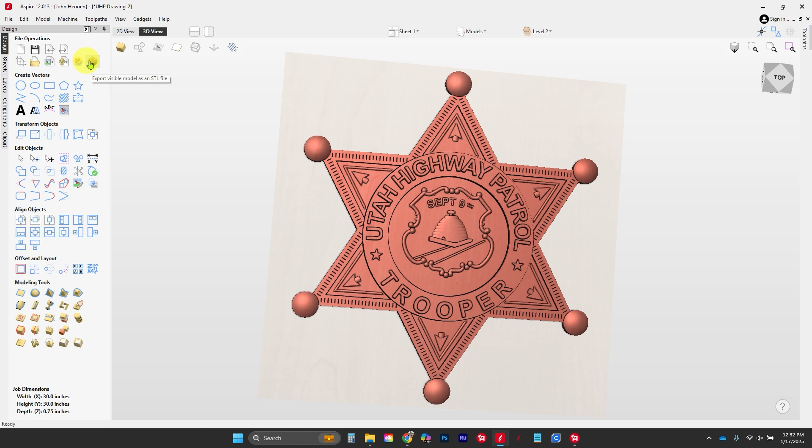So if I go to this one, export model as an STL, I can close the flat plane on the back and triangulate that model. So it's going to build a 3D STL file, which can be imported, used, emailed, shared, whatever you want with it. So here it is.

Okay, we're going to save our triangulation, and this one we're going to save right on my desktop. We're going to call this UHP badge 3D file. Okay, there it is. And we are done. We have this wonderful UHP badge, which is finished and ready to go.

You can take here, we're going to file, increment, and save. So we have this done.